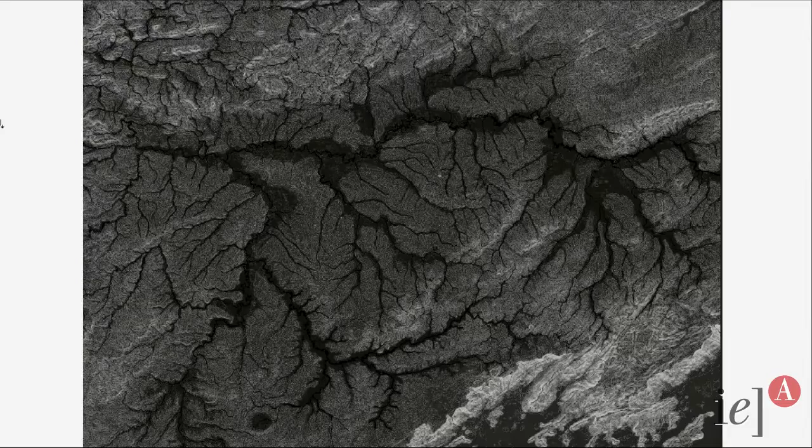But how do they deal with this area? You reduce it to a very simple design. It's very complex, of course, but all that intricacy, all that subtle way the water and landscape work together, gets reduced into these very straight lines of the avenues. If you look at the main avenues of the city at night, you can see the straight avenues in the streetlights.

You see, all the main paths of the rivers were reduced into these avenues, the main avenues of the city. So all the waters are now channelized by the main avenues. This signifies that the speed of the water, the quality of the water, were compromised, because now you have a very fast conveyance of this water, carrying all the dirt, all this diffuse pollution, all the sediments that happen in these huge basins, going directly to the same situation.

Ah, sure, of course. Yes, of course. I don't have my net. Anyway, I can look for it there, but it's so far away. But anyway...

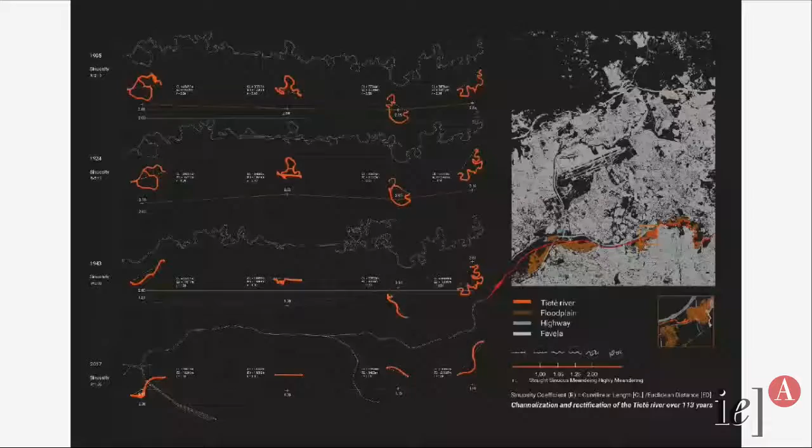And what did you get? You got this. So that was the result of that. And so you got another burden.

You have to go back to see what you did. So it starts to build another wave of work. That was what we call here piscinões - a second wave of fake floodplains. That was how you decide to put back the floodplains that you lost. You make these huge holes that start to mimic what used to be the old use of the floodplains.

But they are horrible, they are terrible. They make like eyesores in the middle of the city. Nobody could live in the city looking at these dirt holes, because you have terrible quality of the water, something that stinks in the middle of the city, and something that's not necessarily the landscape that the city deserves. You have this kind of horrible holes in the middle of the city.

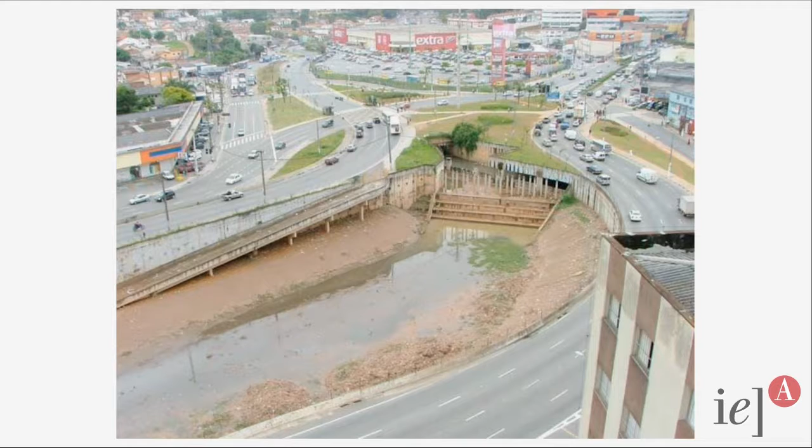But anyway, this was something that goes as an emergency act, and the city accepts that, the people accept that, because they accept this kind of stuff, or they get drowned. So they say okay, we are in an emergency, now you have to get this or get that. So instead of this, you get that. So you got hostage of this situation, you get to accept this.

So of course it's interesting, because all the engineers get a second amount of work, of projects, a lot of money went into that, and it's a kind of well of fortune for a lot of people to build a lot of stuff. A lot of politicians get well done with that, and it was a wonderful world for a lot of people.

So it's another generation, but in the end, this also proved to be inefficient. So you have to follow what you can do next to get away from that. So even now, we are looking for the next generations. You cannot stop at these solutions, because it's proved not to work. You cannot stop at this solution anyway. You can look for next steps to go further, or look for that.

So we start to look for what could be the next steps to go for. And so in this search for how you can start again with this huge problem that the city has created for itself, how you can start to look for how you deal with water inside of this huge basin.

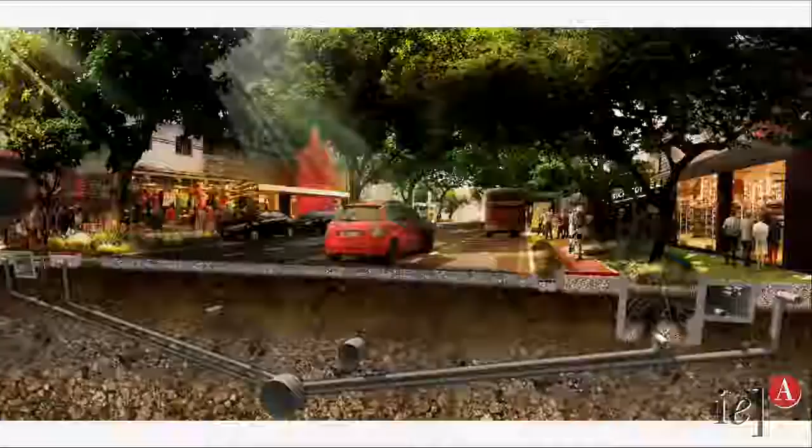This is an avenue in this area, and what we started was to put all these green infrastructure areas in. How much time do I have left? Ten minutes. Oh, I need to go fast.

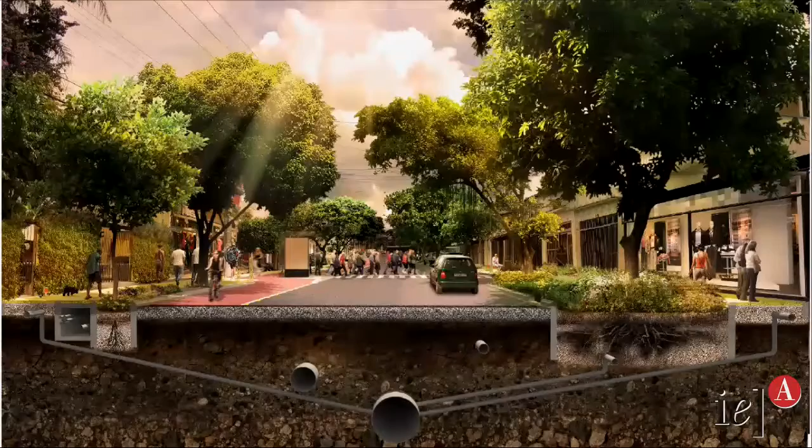So you'll be able to see all the modeling for this water that goes down to the detention pond. Of course, in the end you should have these areas for retention of the water in the main basins, but you're able to do modeling in this project for all the runoff that comes from the main streets. And you can do this even in the most urban situations, when people say you cannot make any...

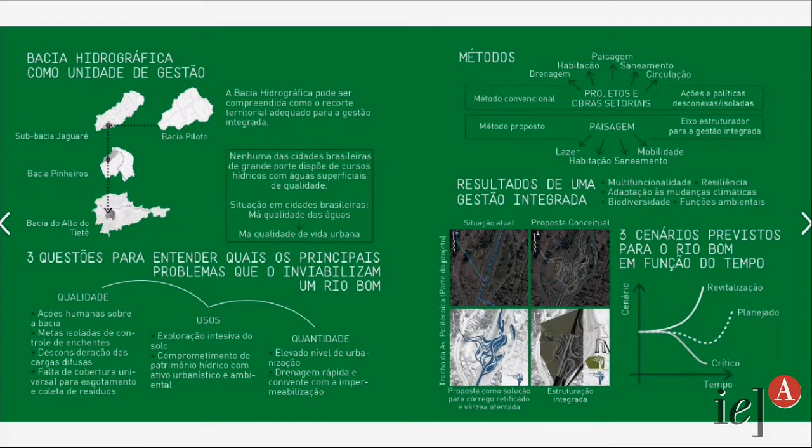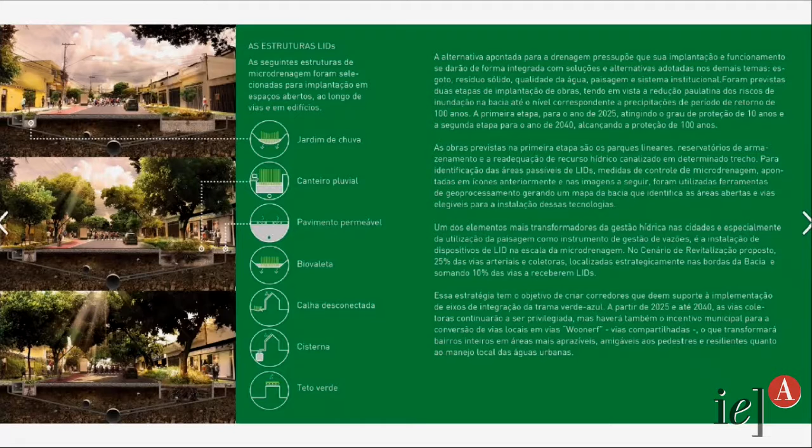permeable paving here — you try to put some permeable paving area here, and you build a primer, a manual, that can show how you can put this green infrastructure here, accessible through this platform.

And so this is the view of the basin in the watershed. We are here. This is the Pinheiros River, and this is the watershed that we studied. The main creek is here, and this is the area where we have studied.

The interesting thing about this project is that all the water has been modeled, and we thought about this dispersed green infrastructure for this whole watershed. This has been done along all the streets, so that when the main runoff flows through the main pipes to the creek, it should be treated.

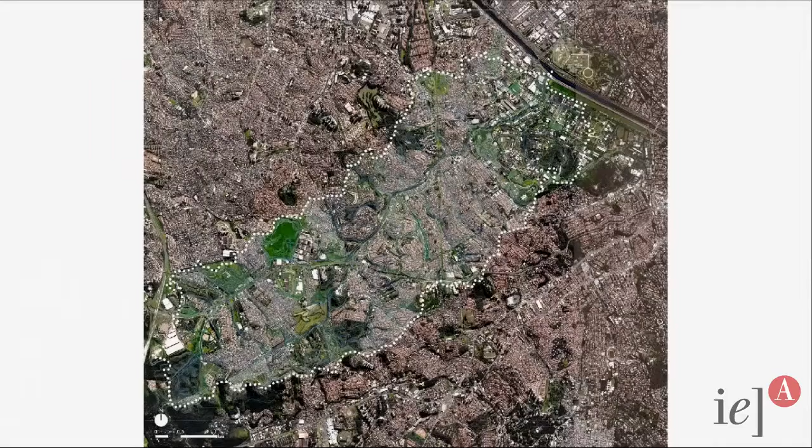But of course, this could only treat the first flush of the rains. The main volume of water still flows down over these areas and goes down to the river. But then all this water that still goes down beyond this will end up in volumes that should be accommodated in the main areas.

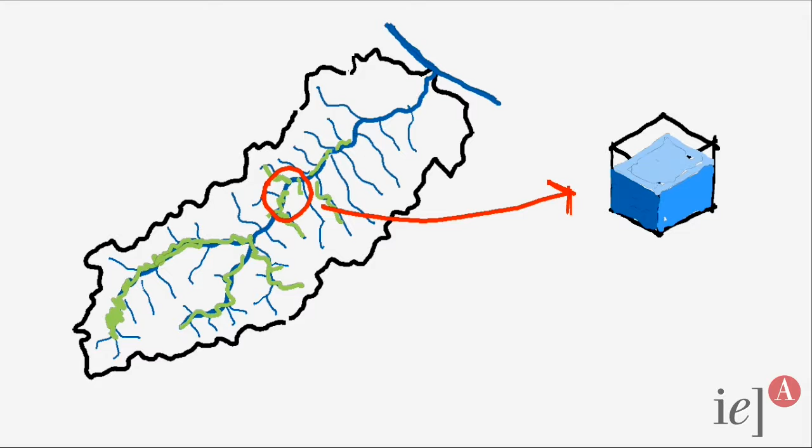And so you start to think, instead of building only this huge piscinão, you can start to create some of these design solutions that could be nature-based, like this one. And looking back, you see that the city already has this being done — nature-based solutions.

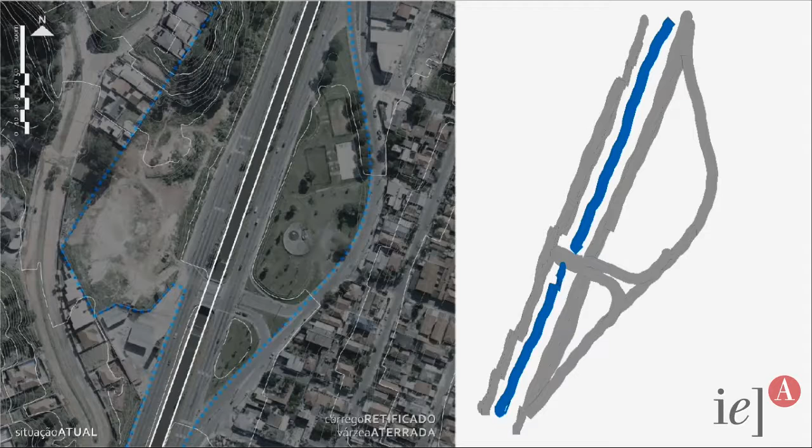And the areas that the engineers told us, where these models show the detention ponds and retention ponds should be built — we started to apply some parametric designs, built using models in Rhino, the 3D modeling software, plus the Grasshopper plugin.

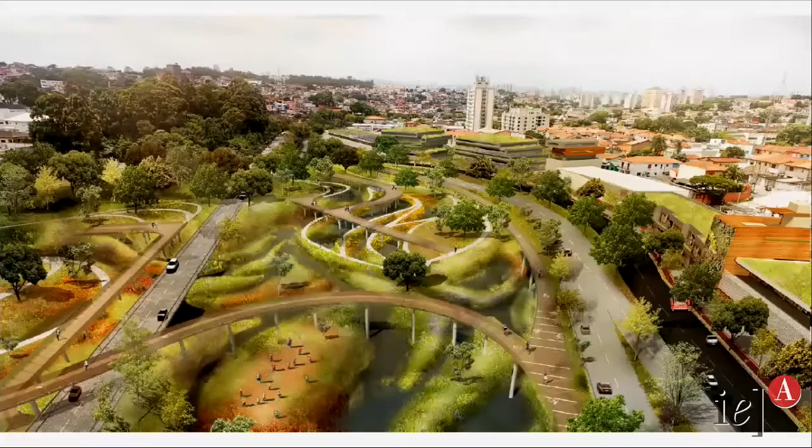We started to create some first models applying this approach. For example, this is just a new detention pond that came from the idea that it could be working together with several others.

But what was the problem with the first generation of piscinões here in São Paulo? They stayed empty all the time, because they should be waiting for the next storm. But now we are thinking about a detention pond, or a retention pond - in this case, an inline detention pond.

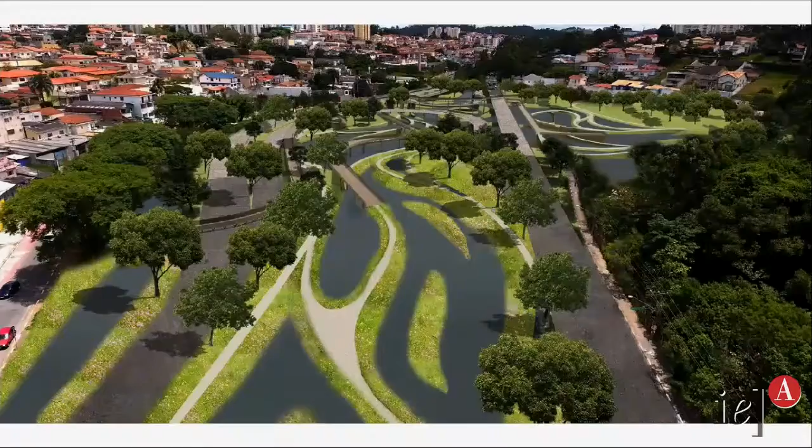In low flow it can store some water there, like a wetland, and could be treating that small amount of water, flowing at different levels, and still be used at different times of the year, like original wetlands. It gets different levels of water, so you can have this totally full or not.

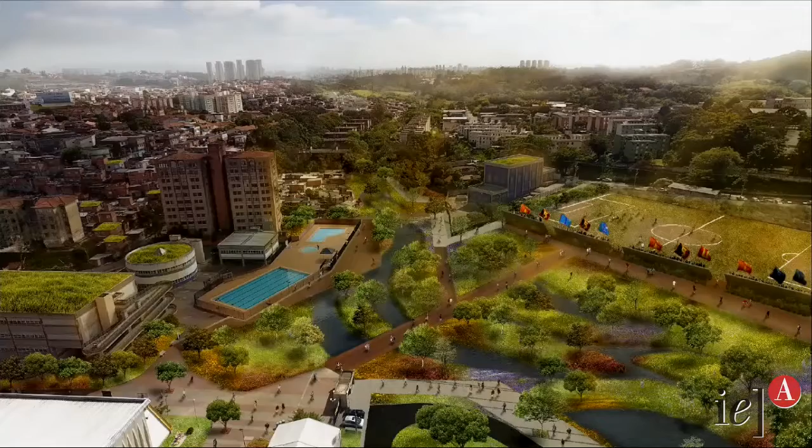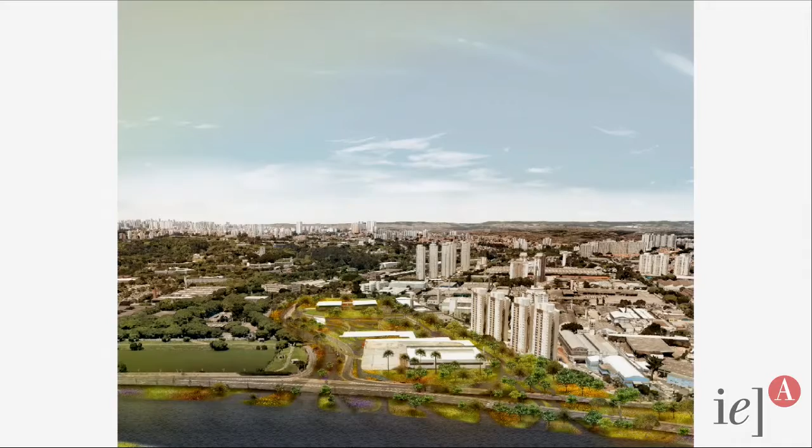And so you got to the headwaters of this water basin and see the other areas where this detention pond should be looking for, where the others should be taking the same principles for the next ones. And you also thought about these other areas.

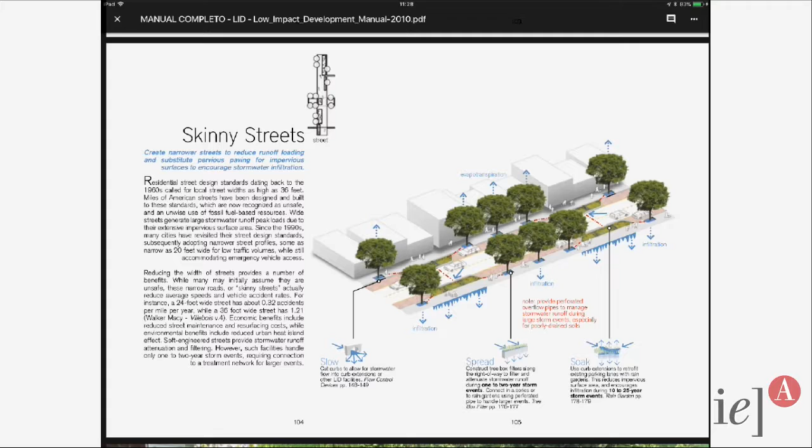Anyway, so far in the end, we have this idea that we can apply this to the next ideas of parks that could be harvesting the waters. This is for another manual, but I think that's it.

I brought this here today because I think these are the three principles that you should be looking for. I don't know if you can look down here - you can see the three words that I think you should pursue: slow, spread, and soak.

I think this is the main idea, how you should be reversing the paradigm of the older, last-century way you have dealt mostly here in São Paulo with the water, the drainage of the water here. That you start to reverse this.

Of course, you perhaps already have a mindset popping up in some ways in the middle of the city. You can see these small interventions happening in the city, but perhaps you can start to see how you can transform this into real work for the city, and perhaps that can be replicated in other cities in other parts of the world.

And I think for those of you who came from other parts of the world, this could be inspiring if you can see water in different climates and different settings, and transform the water not as something that should be gotten rid of, but something that could be part of the work of your landscapes, transforming this as part of your everyday life.

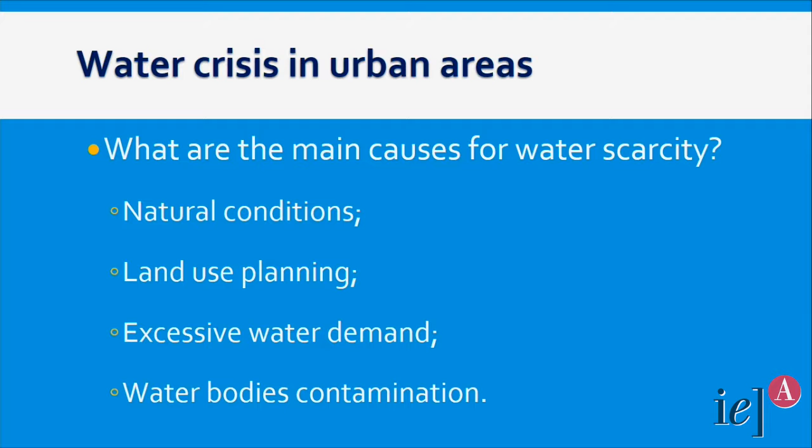However, if you make the region grow too much, exceeding its support capacity, you also have problems of water scarcity. And finally, one of the problems that we have here in Brazil and in most developing countries is the lack of sewage treatment. So the problem is water bodies contamination by sewage discharged without any kind of treatment or poorly treated, and of course the superficial drainage of impervious areas.

So those are the main reasons you can have for establishing a water scarcity problem in a region.

So what can we do? We change the land use, we change our way of life. We are using a lot of resources to keep our quality of life standards. So we have, of course, many solutions, or a combination of solutions, that could be used for coping with water scarcity problems.

Of course, the first one is water conservation. I mean, you need to be aware how to use the water. The main problem sometimes is not that there is a lack of water, but we are using the water in a wrong way. So most of the problems that you can identify here in São Paulo or in other regions is that people use a lot of water without the need.

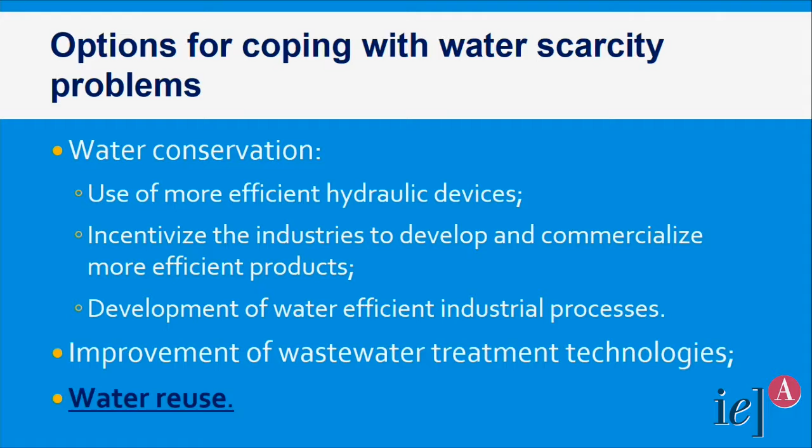My talk will be specifically on water reuse. When you think about water scarcity problems in big regions like the metropolitan region of São Paulo, or any other urbanized city in the world, you need to think about what are the options to have a water reuse scheme. Most people think about non-potable water reuse. When you think about non-potable water reuse, you need to consider problems that can arise from implementing these options, mainly related to the distribution system of water.

In most urbanized areas, the most expensive part of the water treatment system is the distribution system, not the treatment. Here in São Paulo, if you consider all the investment on water treatment and distribution, we have a distribution of 20% for treatment and 80% for distribution. So if you think about moving to a non-potable reuse scheme, you need to think about the costs required to invest for the distribution of this water.

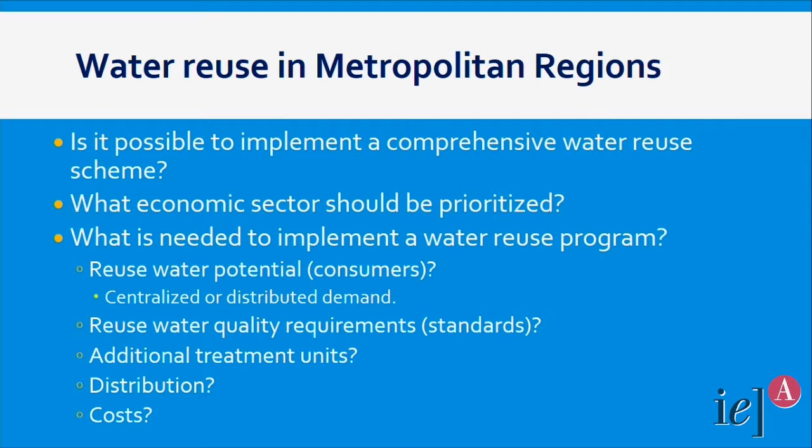This is quite difficult to establish, because anyone who wants to implement a water reuse scheme is waiting for a quality standard from someone - they ask the government, the universities, or other experts on water use to define the water quality to be used. This is not a simple question to respond to. There are a lot of constraints you need to consider.

Even when you apply reused water for toilet flush, people think toilet flush is not a rigorous use and the quality doesn't need to be high, but it still needs some quality. So what is the minimal quality needed for water used in a toilet flush? You need to think about the risks you have in your house.

So if you have a pet, or if you have children, of course the pet will drink the water in the toilet, or even the children can put their hands in and also drink the water. So now, what is the problem?

We try to solve one issue or one question, but we can create a different one, mainly disease spread. So the idea is any water that you use in your house or in any place needs to have a specific quality to protect the people, to protect the equipment, and to protect the environment. So it's not so easy to define a water quality standard for reuse.

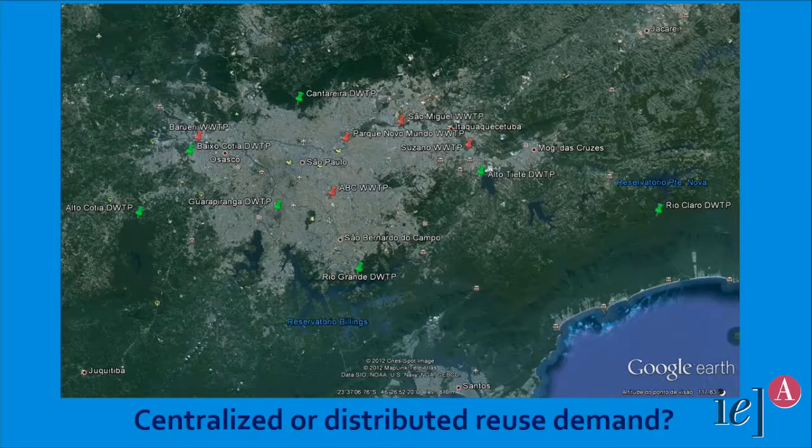And this is most of the houses. So think about producing the reused water in one place here and distributing it to the city - it's quite complex. So you need to invest a lot of money to implement a distribution system. It's not economically feasible.

You can go other ways in order to try to save the water before going to this strategy. But of course, it's possible to implement it for some specific cases, in the case of industrial complexes.

But the reuse feasibility is also completely linked with urban use planning. So you need to plan the reuse water users close to the wastewater treatment plants in order to avoid conveying the water for large distances. This will make the system more efficient. So if you don't have this kind of planning, it's quite hard to make any reuse scheme feasible.

Of course, the reuse scheme will be feasible if you can maybe have some profit regarding that, or it's crucial to have this reuse scheme, mainly for non-potable reuse. One of the projects that we have here in the metropolitan region of São Paulo is the Aquapolo project.

It's the largest reuse scheme in South America, one of the 10th largest in the world. The idea was to use this treated sewage from a wastewater treatment plant, complement its treatment using advanced technologies, and produce reused water for a petrochemical complex.

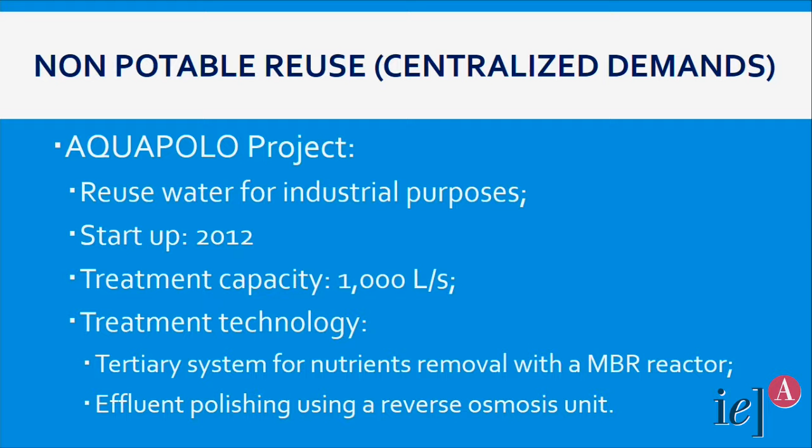So why was this project made feasible? Because there was no water to increase the capacity of production of this industrial complex. So since the pre-salt was discovered, the idea was to increase the capacity of oil production in the refineries that we have here. But to do this, we need to have water.

The Aquapolo project, or the petrochemical complex, is located in a region where there was no water available to increase its capacity at that time. We didn't have it. So the idea was, if I use the treated sewage from one of the wastewater treatment plants that we have, we can solve this problem.

So this project started, the conception of this project started in 2001, just so you have an idea of the time it took to make the decision. So in 2001, people started to think about the water reuse scheme for the petrochemical complex.

A lot of options were developed, and the only one that survived was the water reuse scheme. So the decision making for implementation of the water reuse scheme was taken in 2010, and 2 years after that they implemented the Aquapolo project.

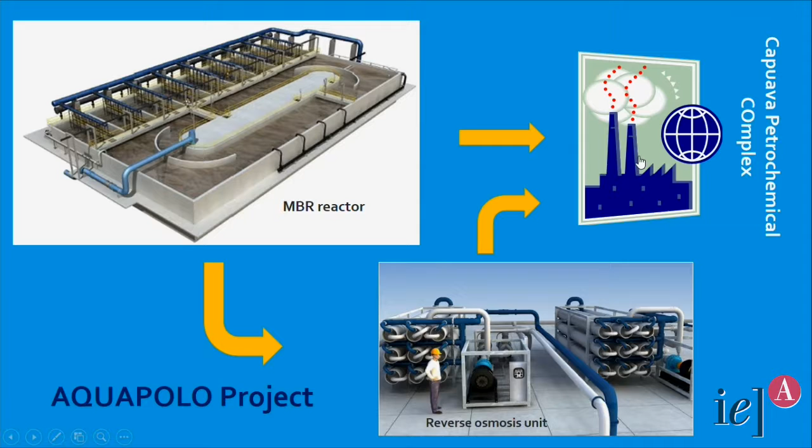What was the main issue related to this project? The distance from the reuse plant to the consumer. This installation is located 17 kilometers from the industrial complex. As I said, the distribution system is most of the time the more cost-consuming part of the system. Only to have an idea, 60% of the investment was for the construction of the distribution line, and only 40% was used for construction of the treatment system.

But of course, it was necessary. The industry was very happy with the system because they like it a lot, because the quality of the water that is produced is quite high compared to the ones they used before.

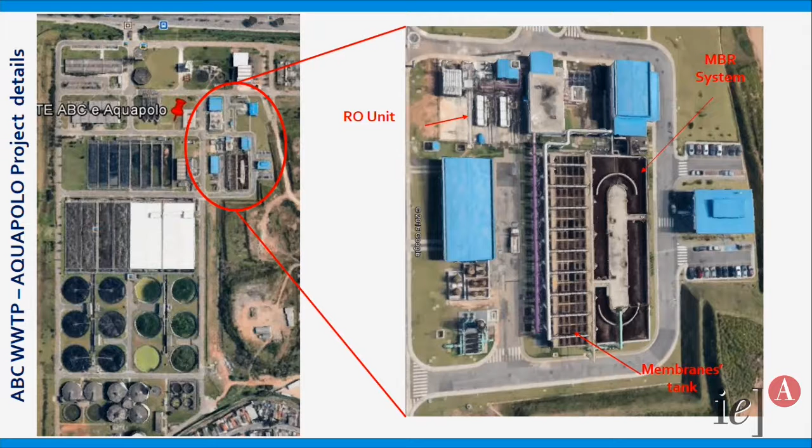Here's an image of the wastewater treatment unit from Sabesp, and here is the Aquapolo, which is the unit that produces the reused water. All this treatment plant has a capacity of 1.5 cubic meters per second. If you look at this system that produces 1 cubic meter per second, it's quite small. That's because of the membrane technology that makes it possible. If you use modern technology, you can save a lot of space for the installation of the treatment systems.

Here we have some pictures of the biological reactor and also the membrane tanks, where the membranes are inside, the water that is produced in the biological reactor, and the reverse osmosis skids. So now they practically treat all the wastewater using the reverse osmosis system too. At the beginning of the project, they would use the reverse osmosis system only 20% of the time, but because of some quality issues, they need to use it all the time.

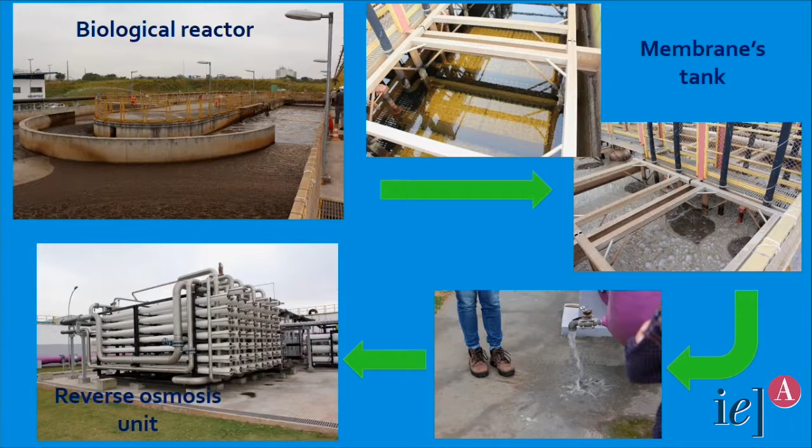Considering the distance to take the water from the reuse station to the consumer, the initial idea was to construct the wastewater treatment system 2 kilometers from the complex. But because of political issues, the decision made was quite different, which had a huge impact on the costs of the water treatment.

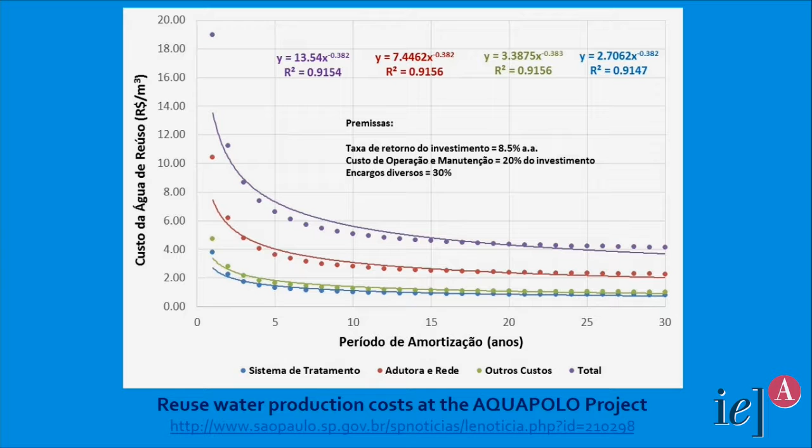And nowadays, most of the countries are thinking about direct potable reuse, which is already done in maybe Africa, Namibia. The Windhoek project, since the 60s, has had a potable reuse scheme.

So the idea of the water reuse scheme is that you have technology to produce safe water using any kind of source. Instead of producing non-potable water, which you need a secondary treatment distribution system for, if you treat the water in a way that it is in accordance with drinking water quality standards, you can use the same distribution system to distribute the water. So we'll only have the cost for the treatment system.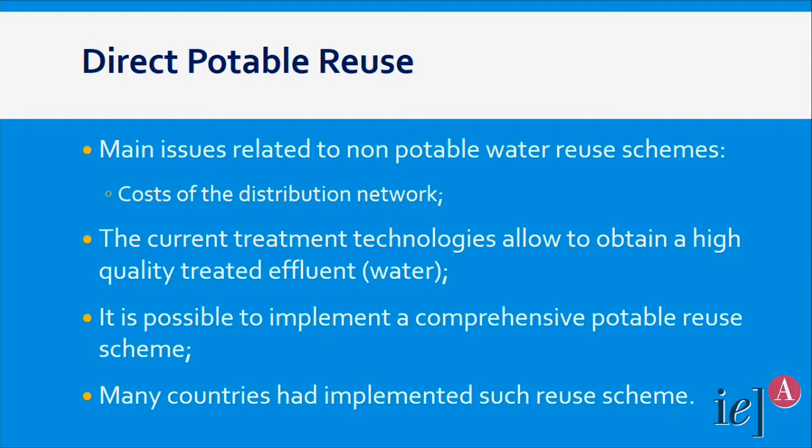So we did some experiments at Sanasa. Here is some news about the use of potable reuse in the United States, Australia, and also here in South Africa.

And considering this, the WHO just published guidelines for water reuse schemes or potable reuse. So now, even the guidelines proposed by the WHO permit that you produce reused water from sewage. So you have the guidelines, now we can, of course, go this way and study it better.

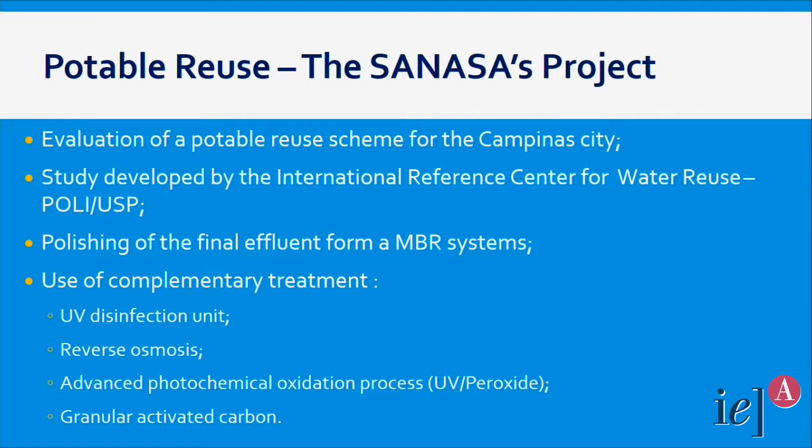Here I will show the project that we developed at Sanasa. Sanasa is the municipal company in the city of Campinas, and they implemented the wastewater treatment using an MBR system, and they are proposing, or trying to study, direct potable reuse. We were hired to develop this research, which took 6 months of pilot plant work.

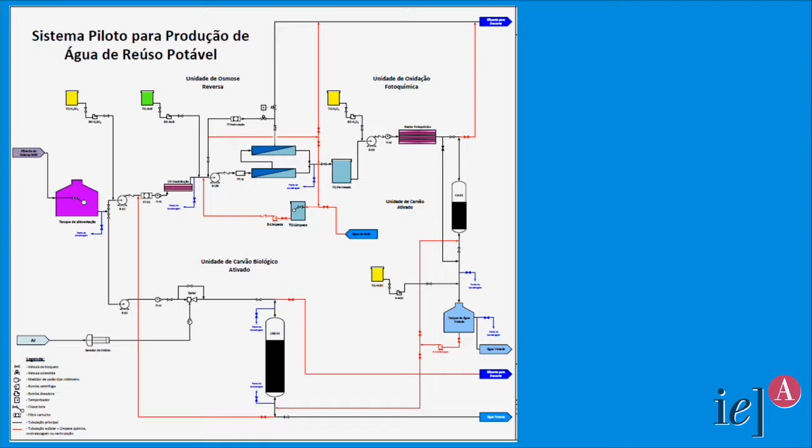So we devised a water treatment scheme that combines basically 5 kinds of technology. The sewage comes from an MBR system, passes through a UV light disinfection system, a reverse osmosis system, and after that we can use advanced photochemical process, or even adsorption in activated carbon, or ozonation, or a combination among all these technologies. So we studied each one and the combination of all of them.

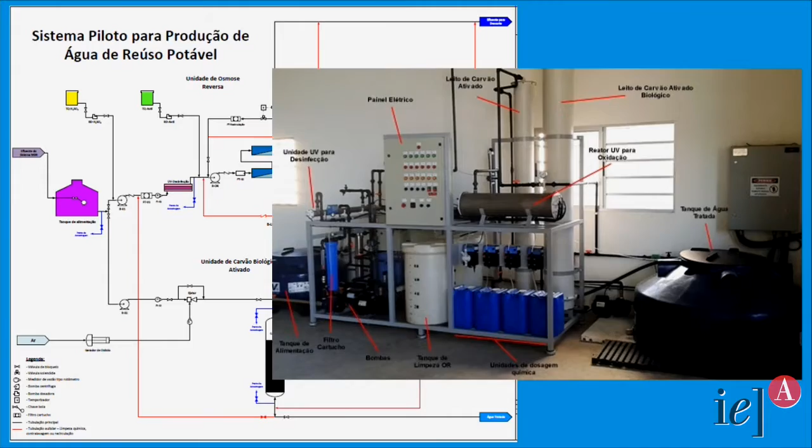And here is the picture of the pilot plant. It's a pilot plant with a capacity of 350 liters per hour. And here we have the results of our research. So we compare the quality of water obtained in our unit with the standard established for drinking water. So in this column, where is the column?

This orange one is the standard, and on the right you can see the quality of the sewage treated by the MBR system. If you look at the parameters, most are in accordance with drinking water quality standards. There are only two that are not: heterotrophic bacteria and color.

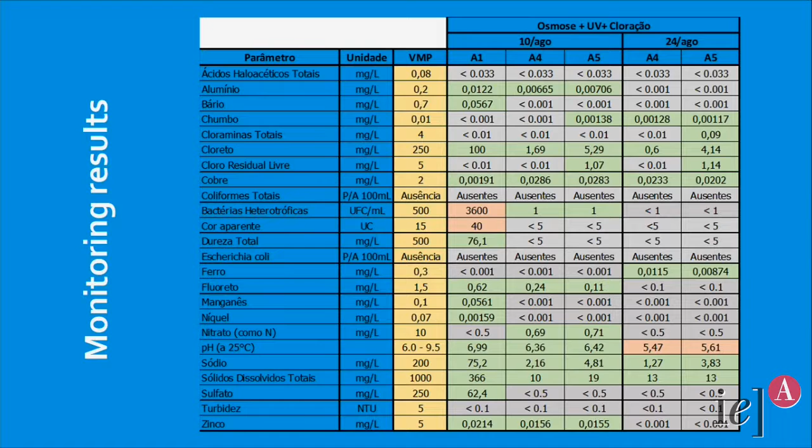Most of the arrangements analyzed were able to produce drinking water with the quality established by our regulations. Of course, the main problem is toxicity. We identified that only one arrangement, which combines reverse osmosis and advanced oxidation process, was able to produce water without any problems of toxicity. So this was the arrangement that was established.

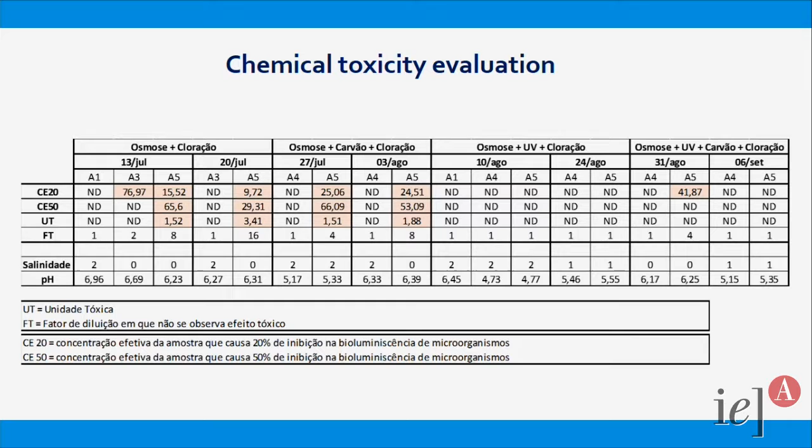To come to my conclusions, very quickly: the lack of planning in large regions in Brazil and other parts of the world induces a lot of problems of natural resource scarcity, mainly water. So you need to address these problems in an integrated way, through better use of natural resources, better planning of cities, and you can complement these actions with water reuse schemes.

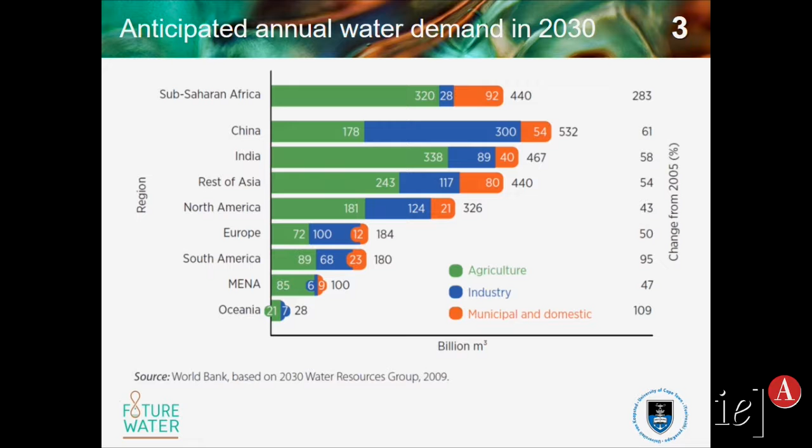To put it in context, sub-Saharan Africa is one of the largest growing water users in the world. You can see from this graph that municipal and domestic demand is growing over time - there's been a 283% change in water demand since 2005. It's phenomenal in terms of the growth of water demand, and we have to deal with this in different ways. You've heard some of those ways this morning through nature-based solutions and water reuse. These are all different strategies that need to be put into the water resource management of our cities.

Urbanization is another major problem. In South Africa, there are many people coming into cities. By 2030, we expect to be well over 70% urbanized, and this obviously also has impacts.

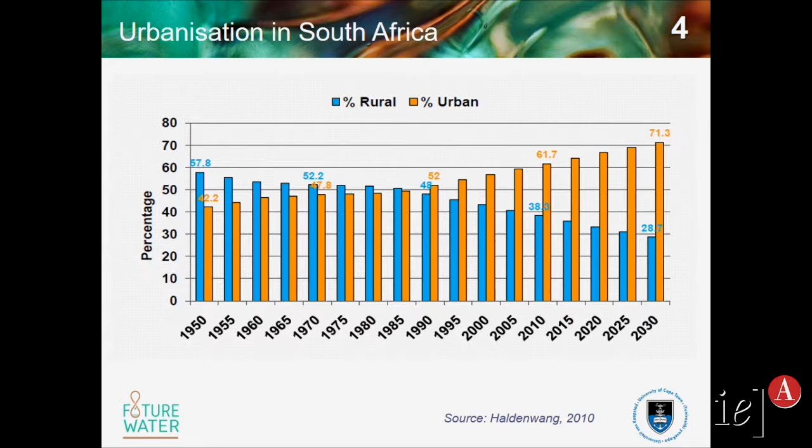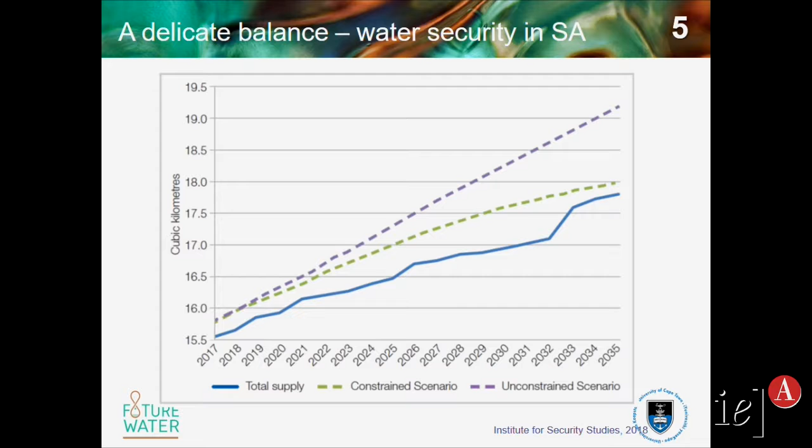And then you've heard all this - yesterday Monica was telling us about treated wastewater and the issues with that, and obviously looking at increasing groundwater extraction as a very underdeveloped resource in the country.

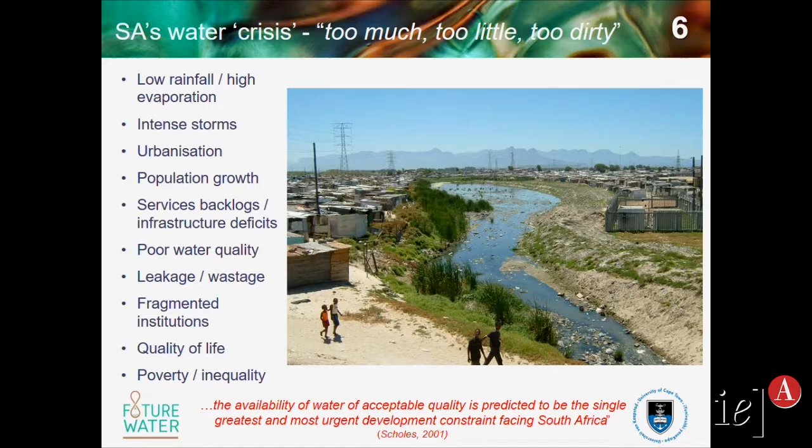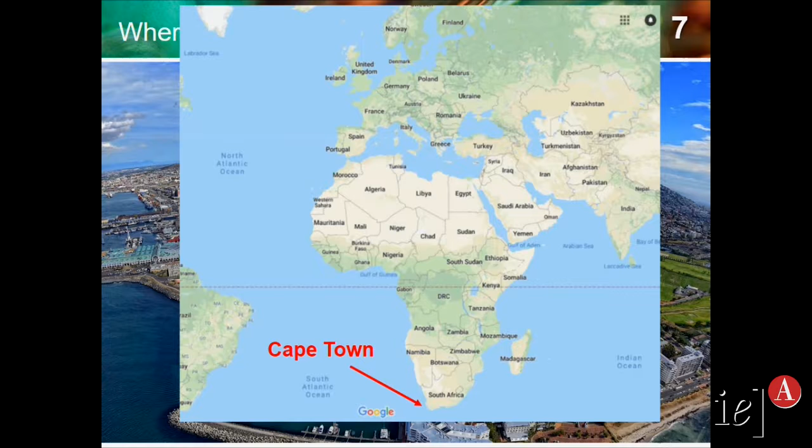Similar to Brazil, we have a 3-tier system - federal or national, provincial, and then municipal. Municipalities are responsible for delivery of services, while the actual bulk infrastructure - the dams, desal plants, that sort of thing - is managed by national government, and the pipe networks within cities and sewage works that treat wastewater are managed by municipalities. I'm telling you this because it has a bearing on how we dealt with the drought and the governance implications of that.

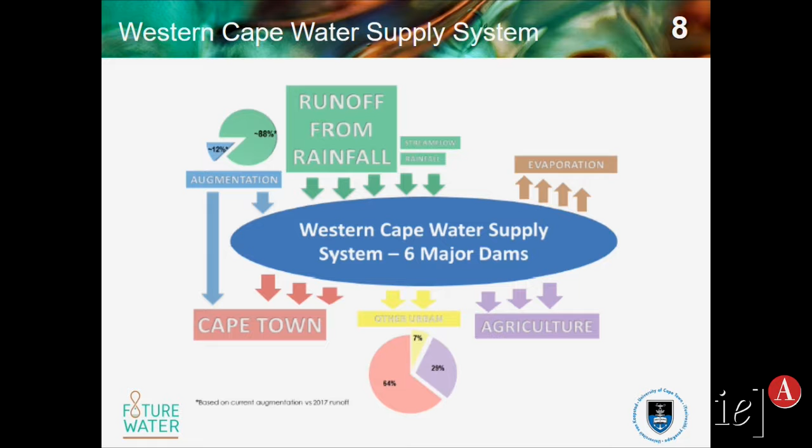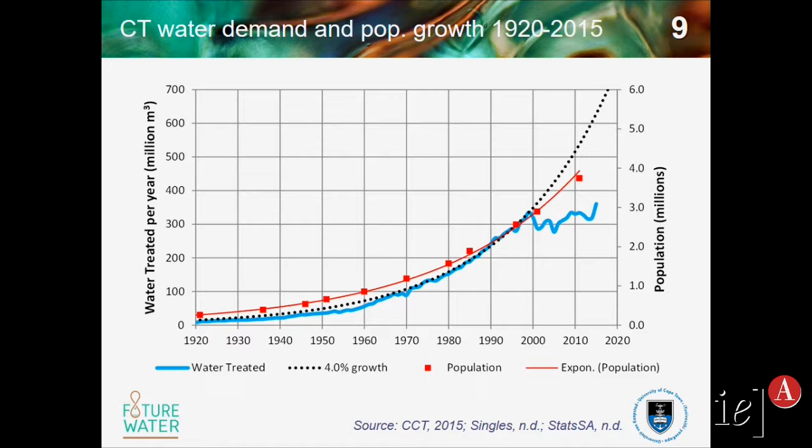And for a long time the demand carried on pretty much on that same level. It turned out to be a bit of their undoing, actually. It turned out to be a problem, because once you've brought that demand down, it's very difficult to go any further when you actually hit a crisis. So they had done a lot of planning, looking at bringing in different augmented schemes over certain years, phasing them in as they needed the water.

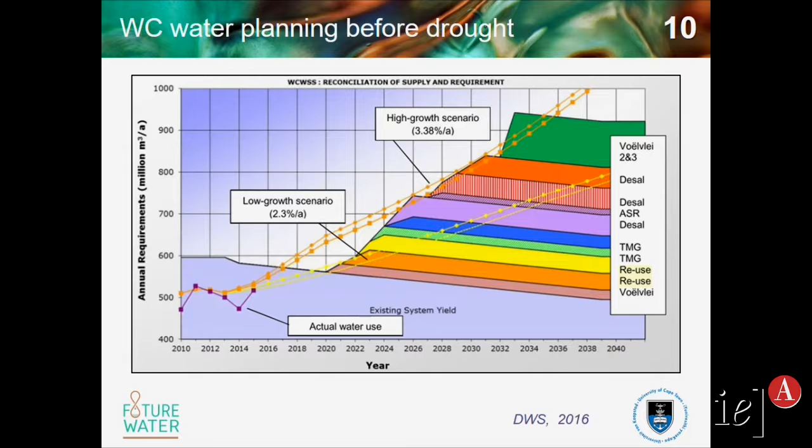These 3 years were below anything we'd ever seen. The accumulated impact of these 3 years of very low rainfall, which did come off the back of an El Nino event but were not necessarily linked to that El Nino, was a drought in the region of about 1 in 1,000 years recurrence. So it was nothing that a water resources manager could have planned for. The planning is usually in place for a 1 in 50 year occurrence.

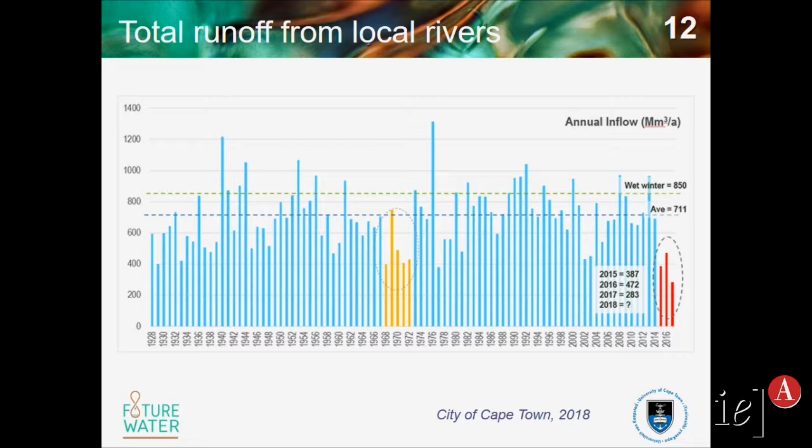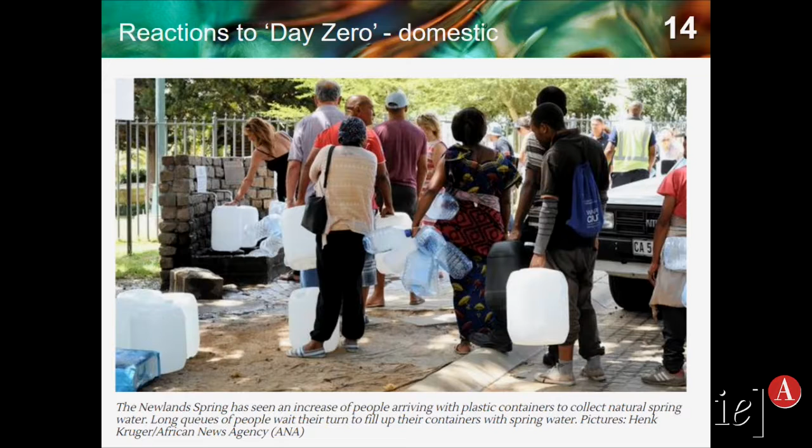And so there was in some ways a bit of blind panic, because people suddenly realized that there was a potential that they were going to hit this so-called day zero. And what happened is that many people started collecting their own water from natural springs coming out of the mountain. You even had people fighting for water. You couldn't get plastic containers anywhere. There were no buckets to be had in any shop. It was the typical human reaction of hoarding, to try and make sure that people were going to be all right.

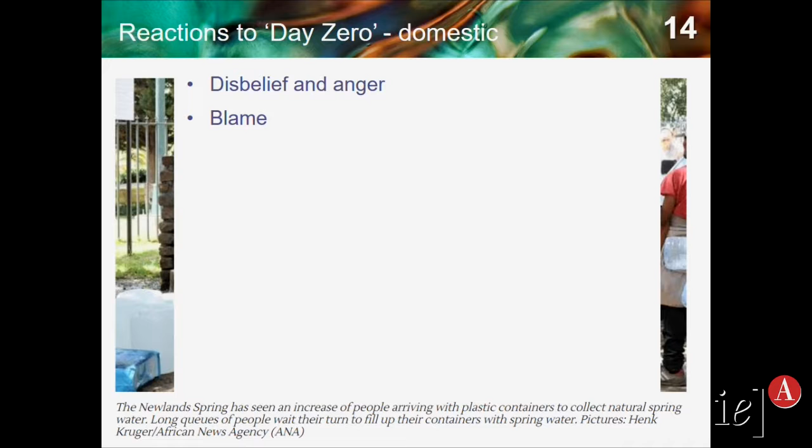And so there were a lot of different feelings, I guess, that came out of this: disbelief and anger, blame, and this panic or water hoarding, queues at natural springs. And this was interesting - many of the springs that we have are not monitored by the city, so many of them potentially could be polluted. And yet people thought that it was safer for them to collect water at springs than to wait and see whether we were going to run out or not.

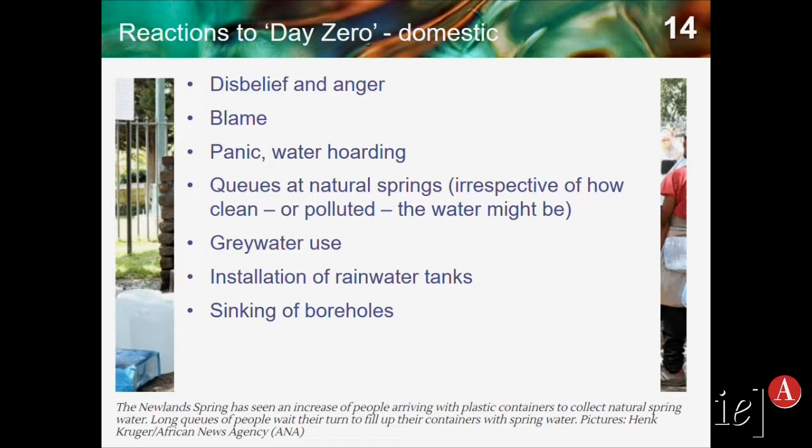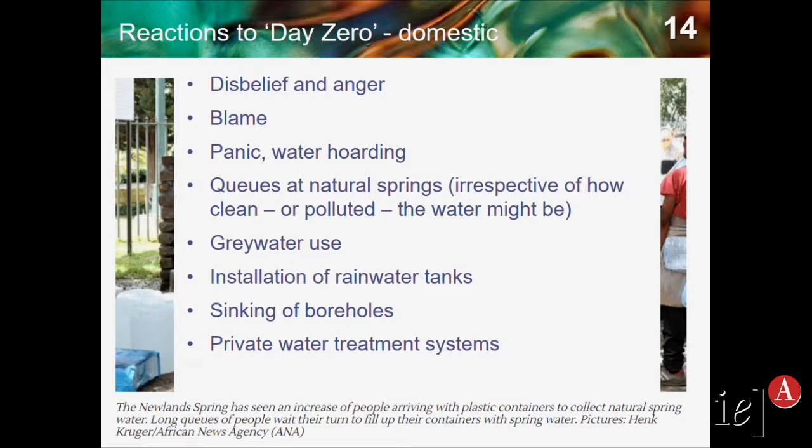There was large-scale grey water use, so we're all still standing in buckets in our showers and using that shower water to flush our toilets, even though it is not an ideal situation. When you are limited to very small amounts of water, you do what you have to do. Lots of people installed rainwater tanks, massive sinking of boreholes amongst the wealthy, particularly those who could afford it. Thousands and thousands of people sunk boreholes, and the impact of that has yet to be determined. We don't know what the impact of that groundwater abstraction is. And then, of course, private water treatment systems, and getting into the spirit of it.

So what was it? This graph just shows the decreasing amount of water available in our dam system over those years, and you can see the downward trend from 2015. And of course it was predicted, as I say, in January 2018, that if we followed that same trend, we would hit day zero in April.

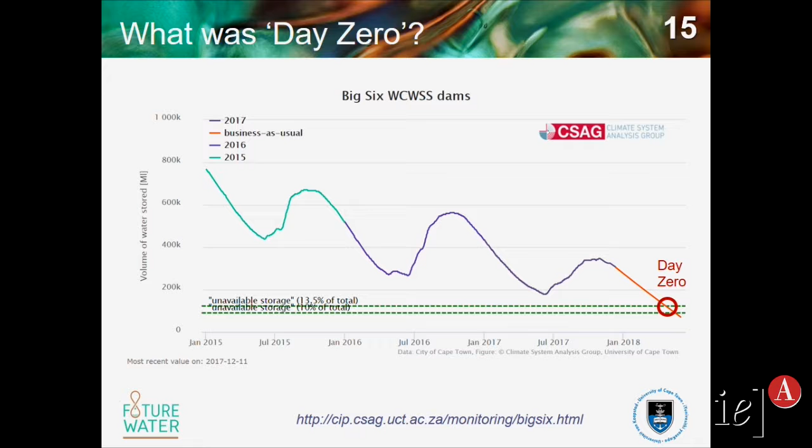Day zero didn't mean we ran out of water entirely. It meant that our dam systems got to a collective capacity of 13.5%, at which stage the city was going to implement disaster management, and we would have to go and get water from distribution points around the city. So they had planned for 200 distribution points. People were going to be allowed to collect 25 liters per person per day, and that was your allowance.

So this is a more recent graph, taken now at the end of August. So this point here is the 27th of August. This black line is the tracking of how much water was available in our dam system from November 2017, and you can see, so the pink area here, this line down here is the 13.5%. When we started in November 2017, we got to about January, and suddenly that line was looking like it was going to hit 13.5% much earlier.

What did happen was that people really started saving water. They lowered consumption hugely, so the line flattened off a bit. There was also some water that we got back from agriculture. Agriculture were then squeezed very hard in terms of what they could use, so there was a bit more water that was left in the system. And then happily, it started to rain in about May or June. So we had good rains in May or June. It's sort of leveled off now.

And as you can see, this is our critical zone here, up to about, it's about 65% I think, that we're aiming to get to. And it's sort of looking as if we'll probably get to around 70 this year. Restrictions will not be lifted until the dams are at 85%. So we're still standing in buckets for the next 6 months at least, I should imagine.

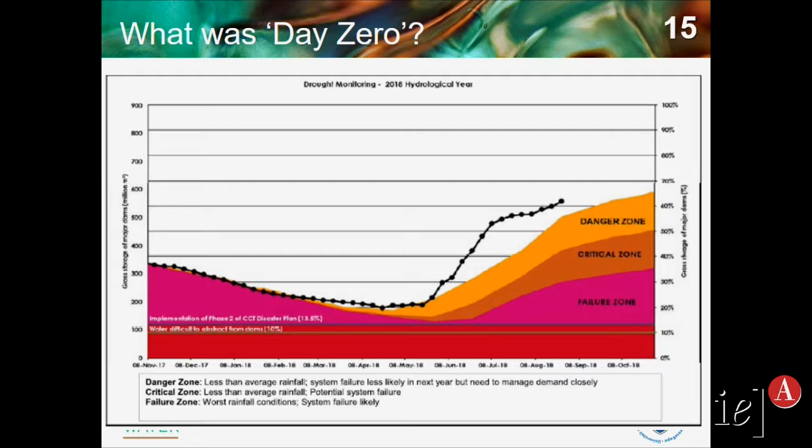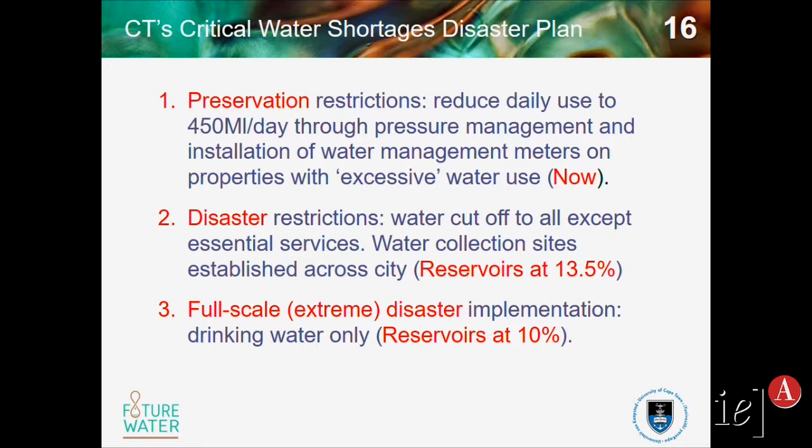So, yeah, we had preservation restrictions. We reduced our daily use down to 450 megs a day through intensive pressure management and installation of water management meters, and that is still what's happening at the moment. If we get to 13.5%, the water's cut off to all except essential services. And once the reservoir's at 10, then it is a full-scale disaster, and we will have to import drinking water.

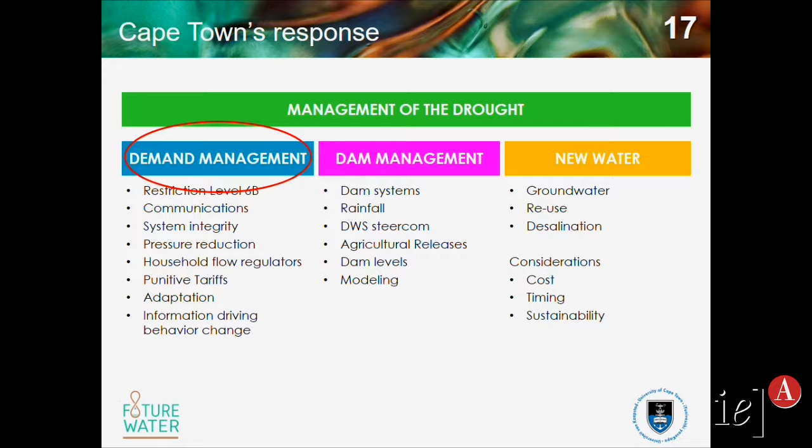So the city's response has been threefold: through demand management, the management of the dam system itself, and also around augmenting water, so creating this new water, these different alternative water resources that can come into our system.

Water restrictions started as early as 2005, so we have been aware that water scarcity is a problem. They really ramped up from 2016 once the drought was there, and even then the city didn't really realize that we were going to get into the trouble that we did. So we started on a 20% saving in 2016. By February 2018, we were down to 50 litres per person per day.

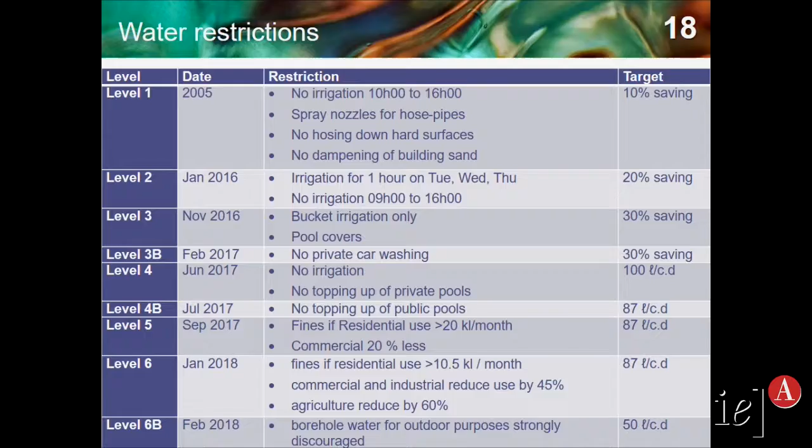I don't think there's anywhere in the world, any city in the world, that has aggressively put their restrictions at that level. The Australian millennium drought were about 120 litres per person per day. Even in California, it was over 100. So I'm not sure what it was here in Sao Paulo - Monica didn't tell us yesterday, but certainly 50 litres is quite severe.

So there's been a lot of information, and one thing the city has been recognized for, it took them a little bit of time, was that they now provide information to private citizens on an ongoing basis. There's no excuse for not knowing where we are in terms of water scarcity in the city. And to try and lower demand, they very aggressively pushed out this water dashboard. We were told every day you could log on to see what date the day zero had moved to.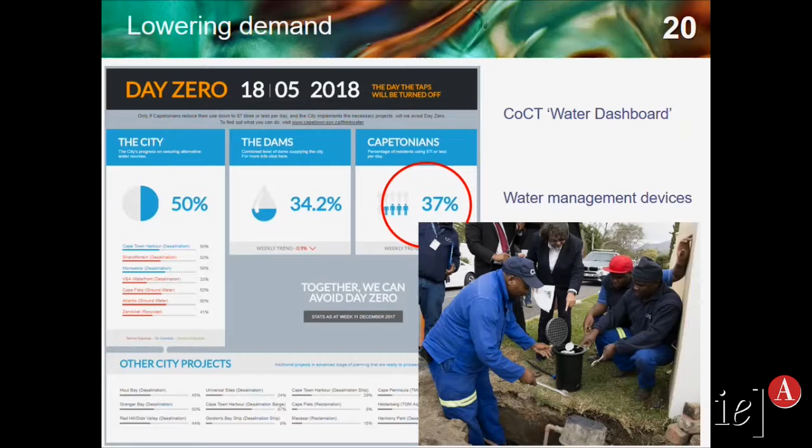The water management devices were very contentious. Thousands and thousands of them were installed into properties - water management meters that cut off at a certain point, installed into properties that used too much water, rich or poor alike. These started out being implemented in poor areas to stop payment defaulters, but there are many more of them now in extremely wealthy areas that were just using water because they could pay for it. So that has been quite contentious.

The weekly dam levels are still being monitored. As I say, we're now at 62%. It is going up now because we're having rain. Interestingly, we're still managing to keep quite low - that demand of 513 megs a day has come down from 1,200 two years ago. So we've halved our demand, which has been quite something.

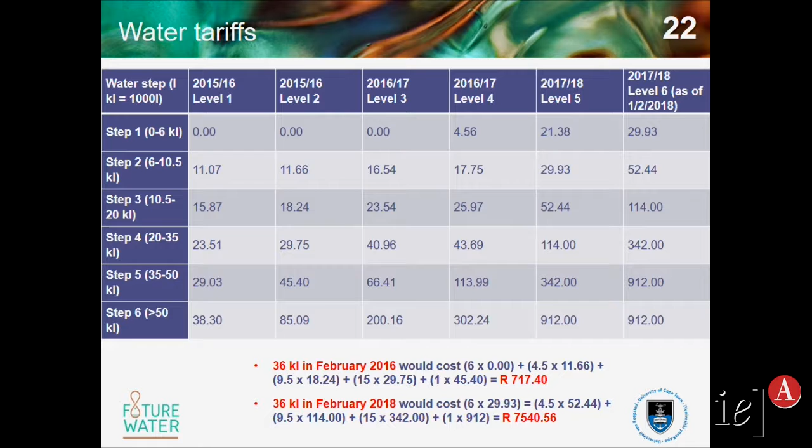Then what the city did as well was put in place behavioral nudges. They created maps which showed how you and your neighbors were doing. You could suddenly see if your neighbor was using more than their allowed 6 kiloliters a month - they got a white dot on their property, which was quite interesting, and made people think about who was living in their street. We all got very cross with those we could still see watering their gardens or doing things they weren't supposed to. So it did push behavior in that regard.

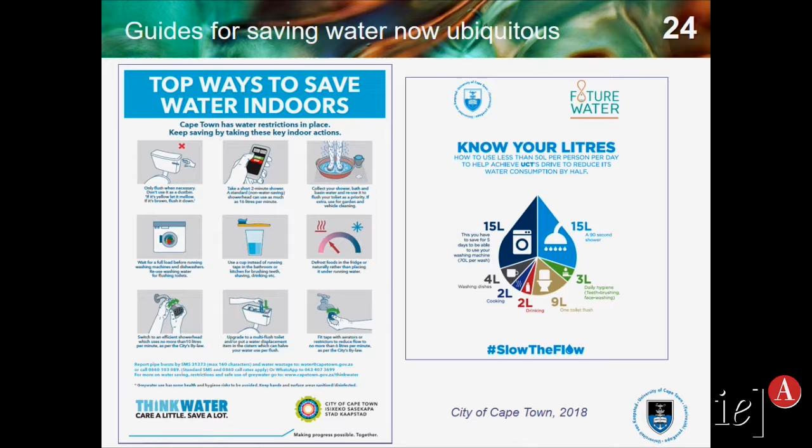There's also real-time feedback through the dashboard, and social recognition of people that were the real good savers, with the city actually cooperating with people as well - lots of guidelines, ways to save water. As I say, nobody flushes toilets anymore with potable water. These are activities that need to be kept in place.

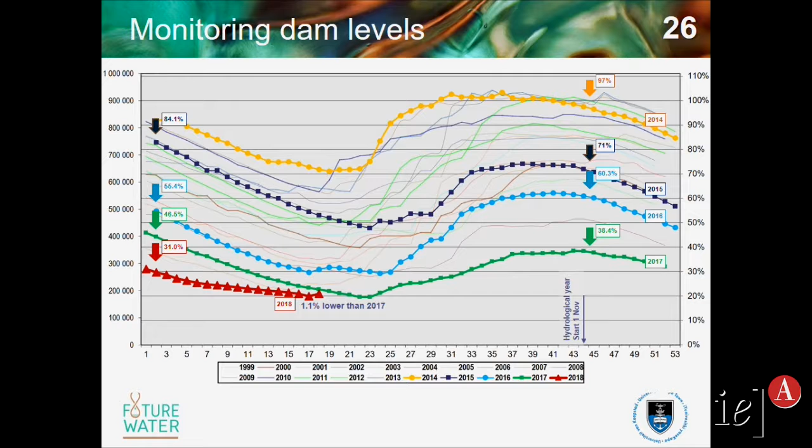The dams have been very carefully monitored over time. The red line there is tracking - it's now gone up significantly, and we look as if we're more or less on track for 2016 levels at the moment, but the city is very carefully watching that.

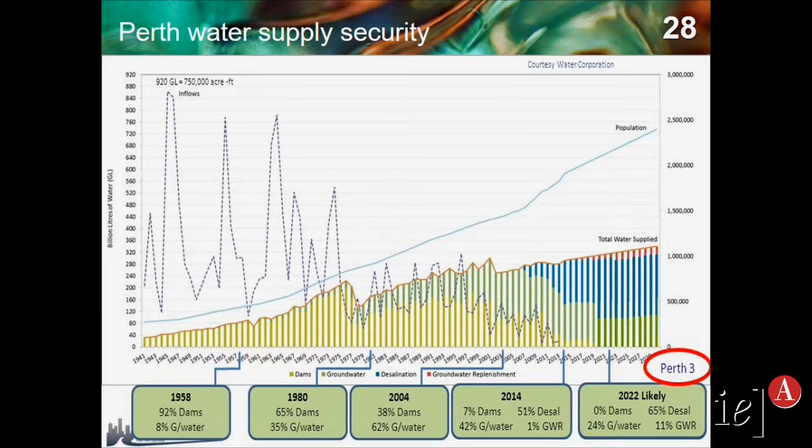They're also looking at how to bring in new water, and I added this slide on Perth because it's quite an interesting comparison. Perth started in the 1950s with a very similar reliance on surface water and a very small amount of groundwater. They soon realized this was not sustainable, so over the last 50 years they've completely changed their supply system from 92% surface water to a predicted 2022 use where they will have no reliance on surface water storage at all - dams will only be used for agriculture, and city supply will come from desalination, groundwater, and recharge. We know we've been doing something like that, reshaping Cape Town's supply.

We now have large production boreholes to tap groundwater. We're looking at sewage reclamation, what we've just heard about, and of course desalination of seawater because we are at the coast, although we hope not to go into large-scale desal.

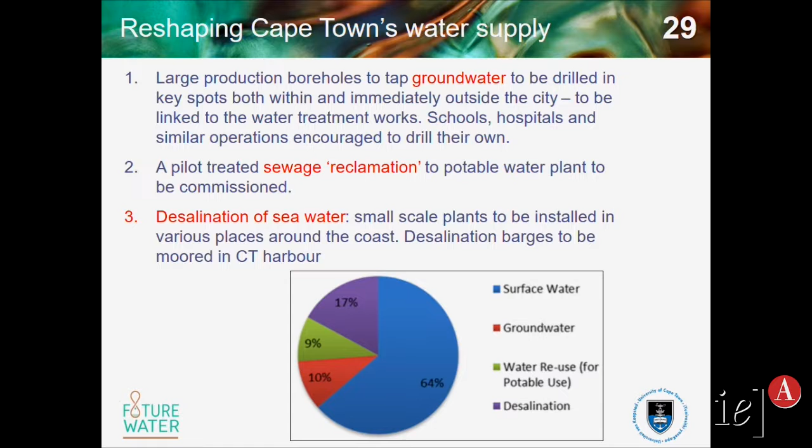There was obviously a media frenzy around this water crisis, and many of us became instant celebrities, much to our horror, because we were constantly being interviewed about the drought, where it had come from, and who was to blame. There were even some crazy things that came up - people deciding that towing icebergs from the Antarctic would help us, and it went into feasibility studies. These were people that were really serious about solving the water crisis in Cape Town.

I had one man from Alaska who phoned me and said he would send super tankers with water from Alaska to Cape Town, which I politely declined. But we had some crazy schemes.

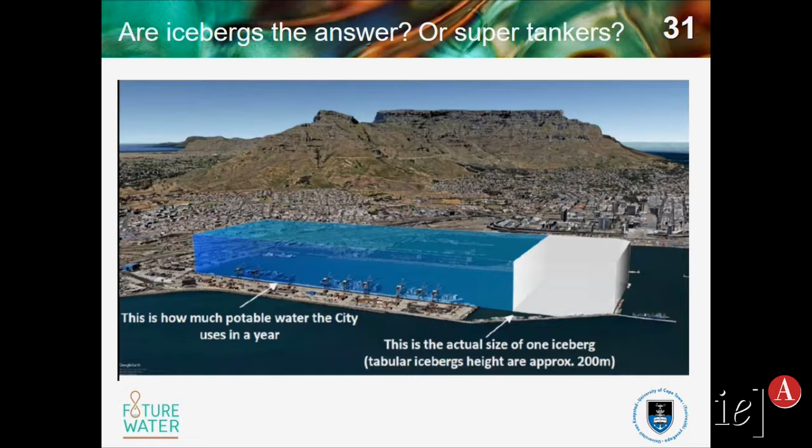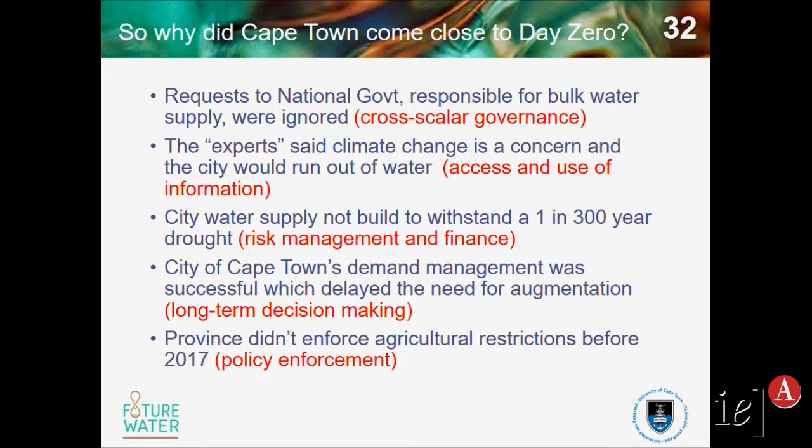From a governance point of view, why did we come so close? There were definitely issues around the scales of governance levels, with national government not talking to local government and not coming up with early enough decisions. The access and use of information was a problem. Obviously, finance, risk management, and long-term decision-making all played into this bigger problem. And the barriers that were in place was that the link to province and national took a long time. So before even a disaster zone could be declared in the province, it took months and months of negotiation, which left out very precious time to start getting the finance going.

Poor communication in the beginning, although that really did improve. And then the challenge of securing funding was a real problem, as we heard yesterday. As you decrease demand, you decrease revenue to the city, and so you decrease the ability for them to be able to put in schemes to sort things out.

Enablers: we've seen many things working much better than before, working across departments, moving departments together. They've set up a water resilience committee. It's prompted a new water strategy. There are impressive levels of project management at the city, very good data sharing. So these are all wonderful wins that have come out of the crisis.

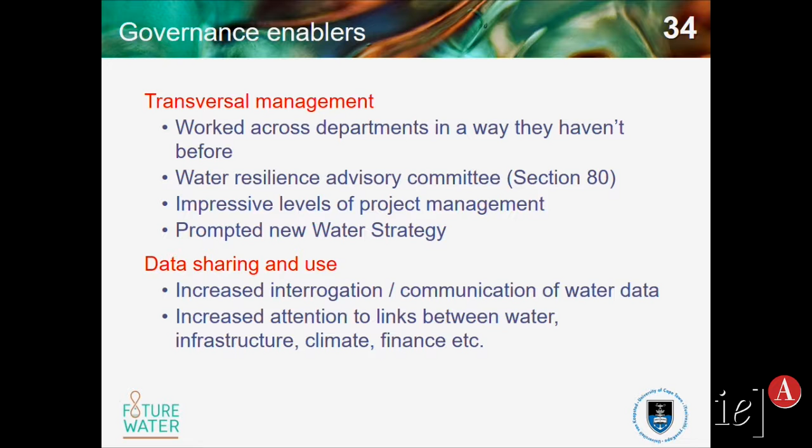So the 5 key lessons, and I'm finished now: climate change is not a slow onset disaster, it hits you in the face like a steam train. And that's what we've heard, that is what we've learned from this. Nobody could have planned for this, and the planning for this uncertainty involves completely new ways of doing things. We can't use the same models that we've used in the past. We can't look at the climate predictions as we have previously because things are just not the same.

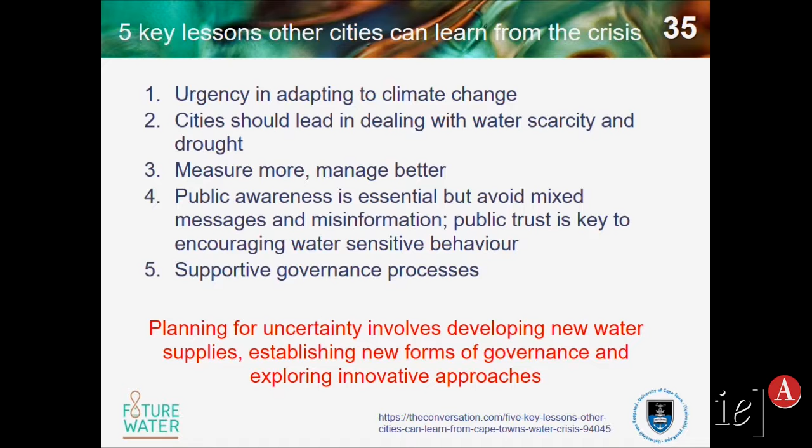Cities should lead. They can't depend on their national government counterparts to support them. Cities have to put in place the structures, the green infrastructure solutions, the alternative water resources that we need to see very strongly on their own. Measuring and monitoring is really important. Public awareness is essential, and we need to have those supportive governance processes, those policies and regulations that allow us to do things differently to what we've done before.

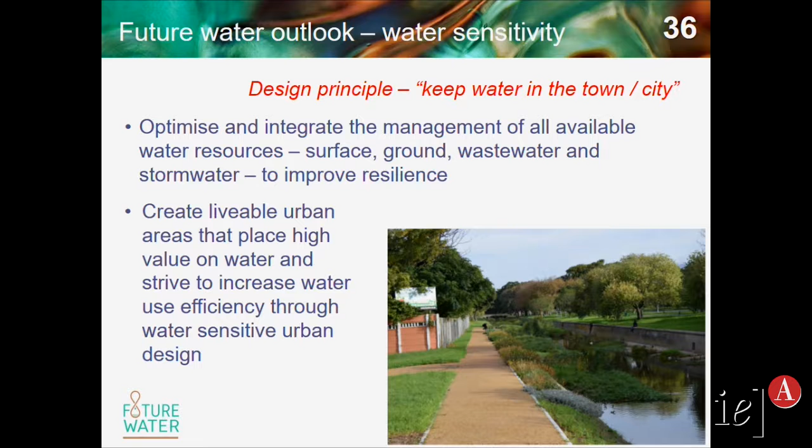So yeah, this is it: keep water in the town and city. That's what we keep, it's our mantra at the moment. Optimize and integrate the management of all water resources in a city space, and create livable urban areas that place high value on water and strive to increase water use efficiency through water-sensitive urban design, which is one of our very strong research focus areas at the city, at the university. And that's me.